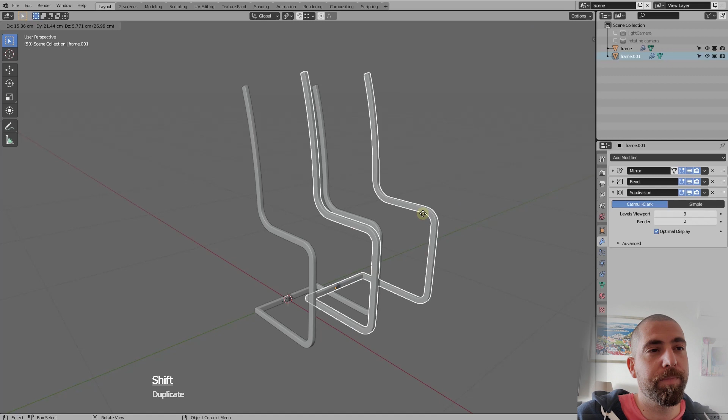So this is our frame, this is our object. Let's call it frame by double clicking. Then with the frame selected, we're going to press Shift D to duplicate this object, and right click to keep it in the same place. We're going to name it seat, our second object.

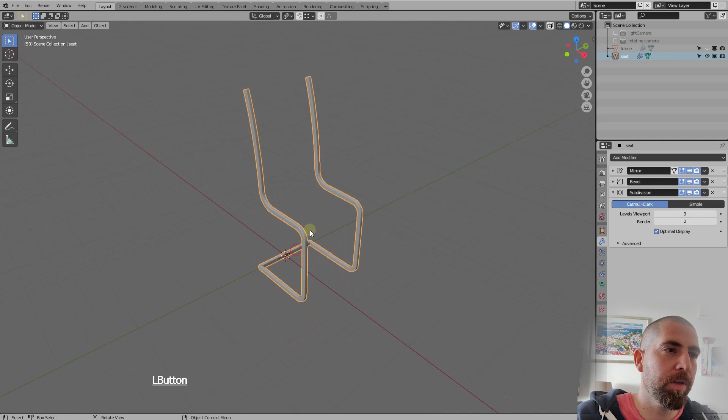Then we're going to switch off the visibility of our frame so that we only have our seat. I know this doesn't look exactly like a seat, but we'll get there.

Have faith, have faith. Okay, so now what we're going to do is turn off all our modifiers, because when we duplicated this object, we also duplicated its modifiers, and we're going to turn them all off.

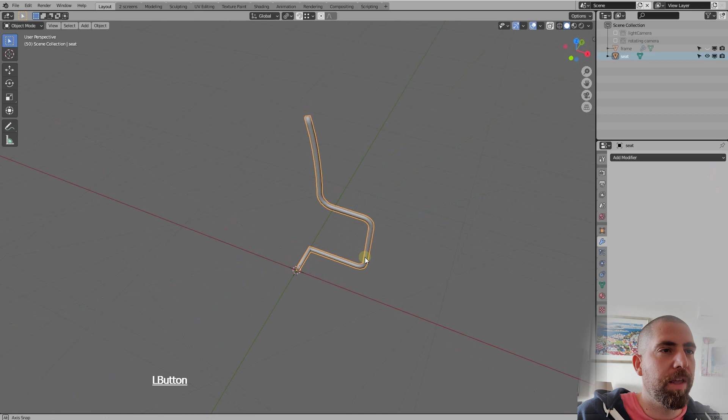And what we're going to do is go into our object data properties panel, and under normals, we're going to auto smooth by 30 degrees. So it smooths these edges, but not this sharp edge.

Then we're going to go into edit mode and select these faces. We're going to be in face select mode by pressing 3, select this face, and hold Control to select all the faces in between these two faces.

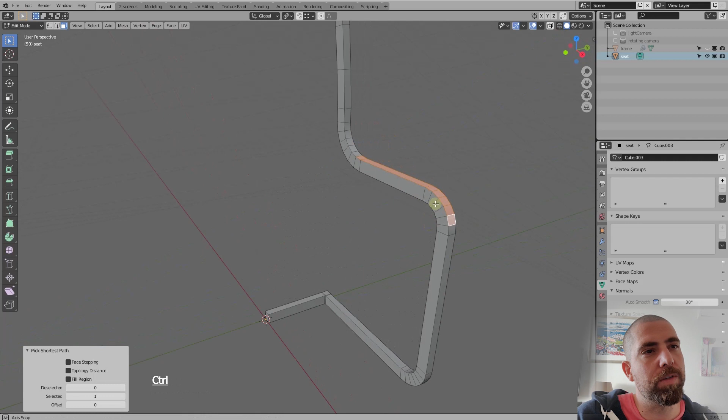Then we're going to press Control I to invert selection, press delete, and delete faces. So now this looks a bit like a seat, doesn't it?

Let's turn on our frame again, and here we go. Now we have our object. Let's select all and go to extrude region, press and hold, and select extrude along normals.

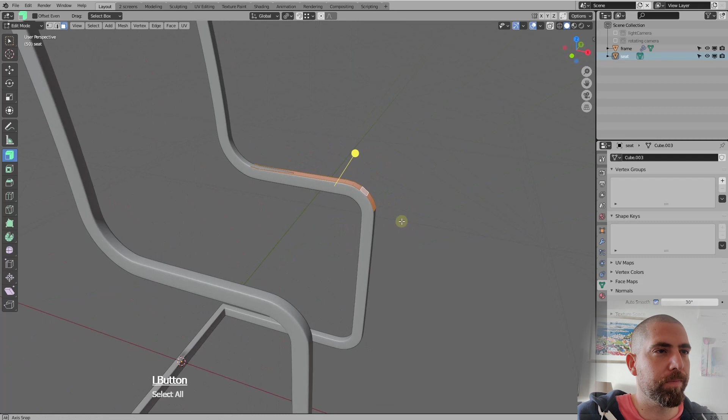So this little circle appears, and you can press and hold and extrude it. In our pop-up window here, we're going to try with 6 centimeters to see how it looks.

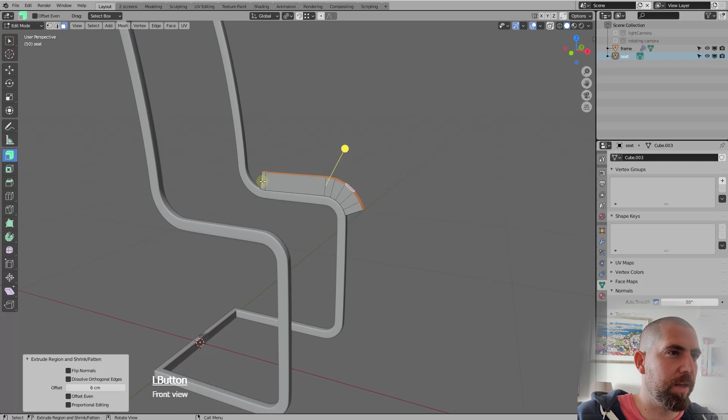Let's go into front view with 1 on the numpad. 6 centimeters looks fine, let's go with 6. Then we're going to select these faces by holding Control, go into select box tool, and move them.

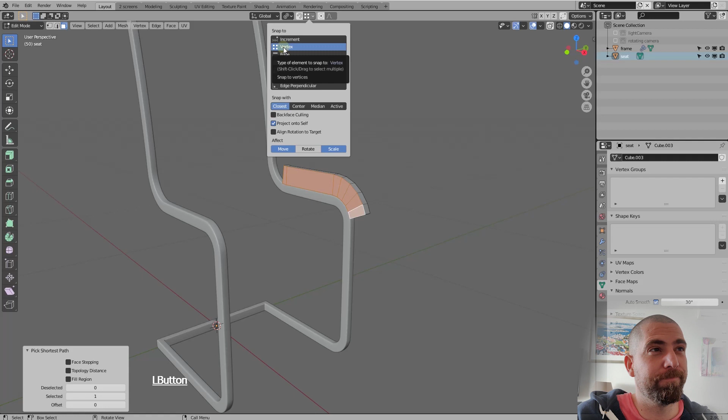Another thing we're going to do here is snapping. We're going to select this Vertex Snapping. Snapping doesn't need to be enabled if you don't want it, but this is another cool tip for you.

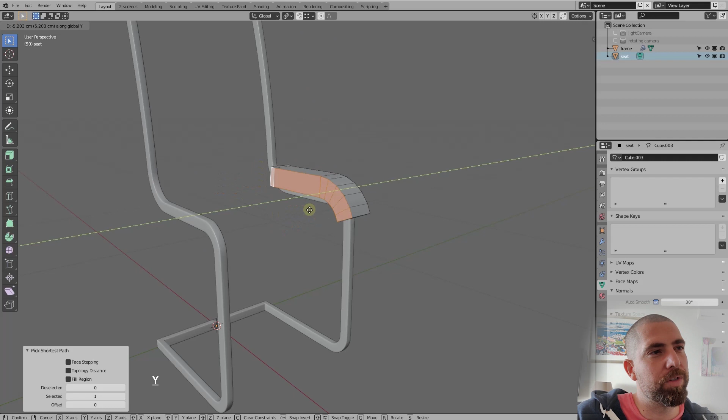Now I want to move this on Y to constrain it on the Y-axis, and snap it to somewhere around here. As you can see, snapping is disabled, and once you've started the transformation, you can't turn it back on. But this is a little workaround: you can hold Control, and this automatically enables snapping.

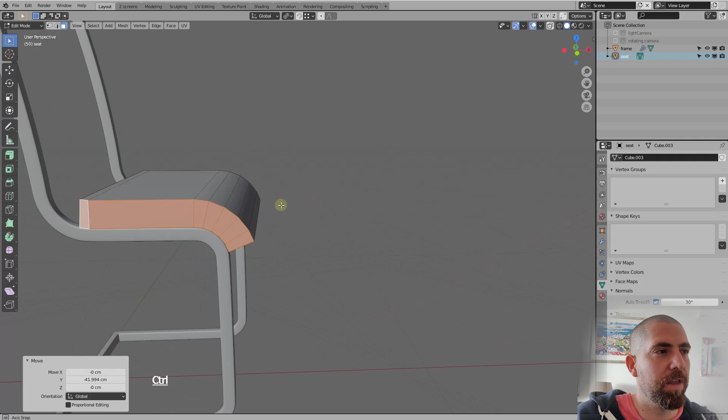So now I want to snap to this vertex around here, and we have our primordial seat. It obviously doesn't look as good as it should, but let's keep it like this for now.

Because what we're going to do is go into object mode, and now we will add a modifier. We will not add a subdivision surface modifier this time, but a multi-resolution modifier.

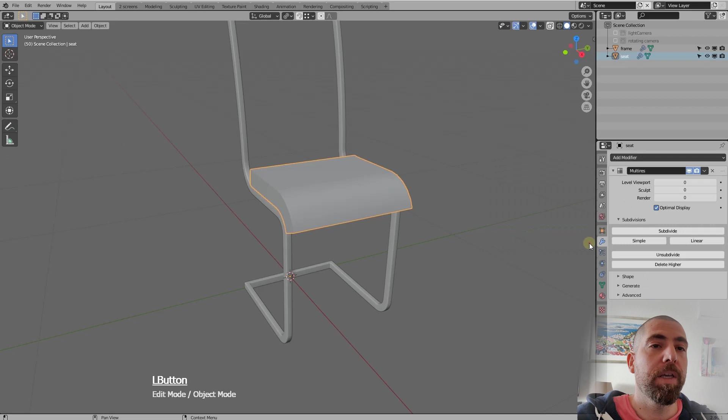It works very similar to subdivision surface, but you can sculpt on it. So that's the cool thing about it. You can sculpt on practically the simplest geometry.

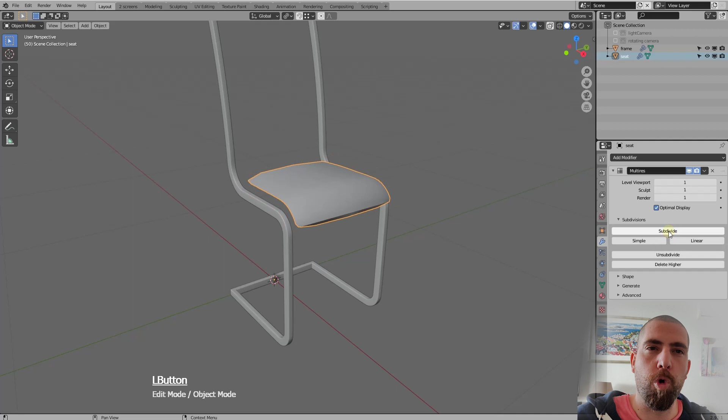But first we need to subdivide it, and we're going to subdivide it by 4. I'm sure it's going to need 4 subdivisions.

So you can see that the results are very, very similar to the subdivision surface modifier, but you can see that something is not right here.

So we need to, just like we added a loop cut here, do the same thing here. Let's go into edit mode.

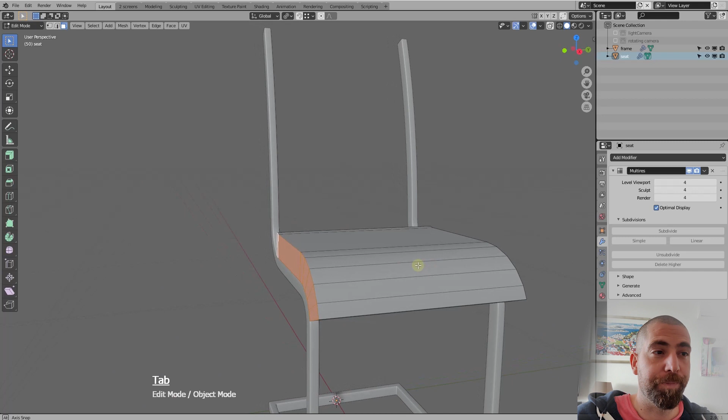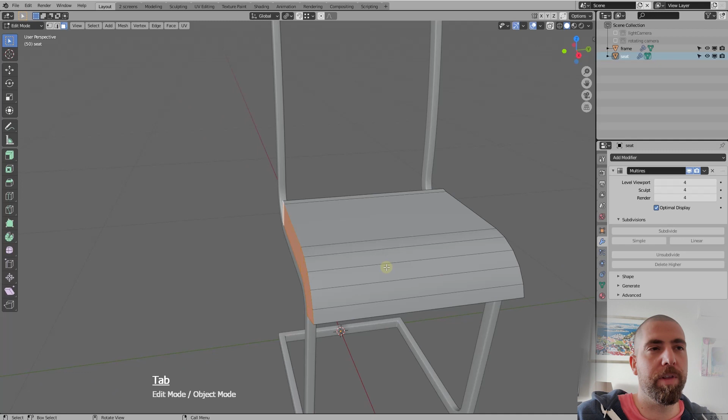The difference between subdivision surface and multi-resolution is that when you're in edit mode, you don't see the change in the modifier in real time. So you need to change something and then go out of edit mode to see what has actually happened.

So this is not the good thing, but everything has its pluses and minuses. You win some, you lose some, you know. So what do we do now? We're going to add a loop cut, but this time we're going to add 2 of them.

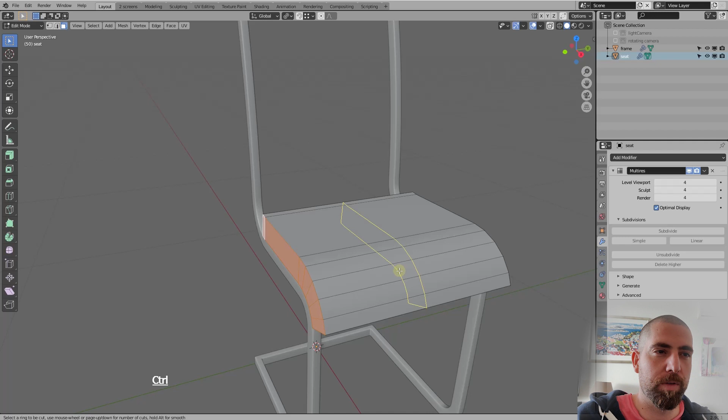So Control R, this is one, and we're going to scroll with our mouse up, click once and click another time, and now we have 2 loop cuts, and we're going to scale them not on the x-axis but on the y-axis.

So why aren't they scaling, you might ask? I'm going to tell you why. Because our transform pivot point is set to individual origins.

I don't know if you can hear the tappity tap. Anyway, so the pivot points are right here, and they're all scaling on the y-axis like this, and so nothing happens. So we're gonna set our transform pivot point to bounding box center. So this is like a bounding box, and the pivot point is going to be here. So when we scale it, these loop cuts are going to move.

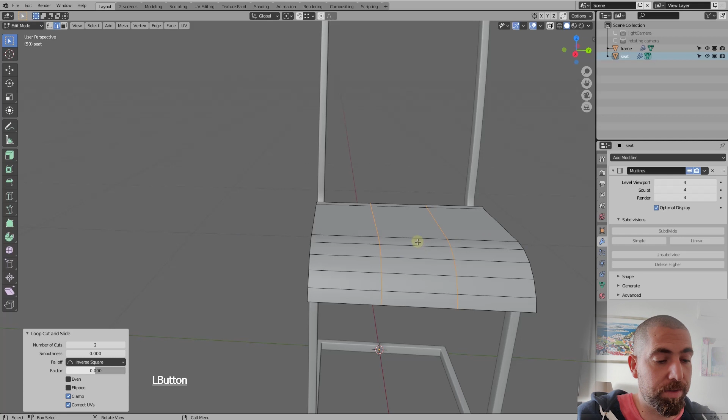Let's see if I'm right. S to scale, Y to constrain on y-axis, and this is exactly what we wanted. I could have just added 2 loop cuts in position 1 and then the other, but then they wouldn't have been symmetrical. So this is why I did this.

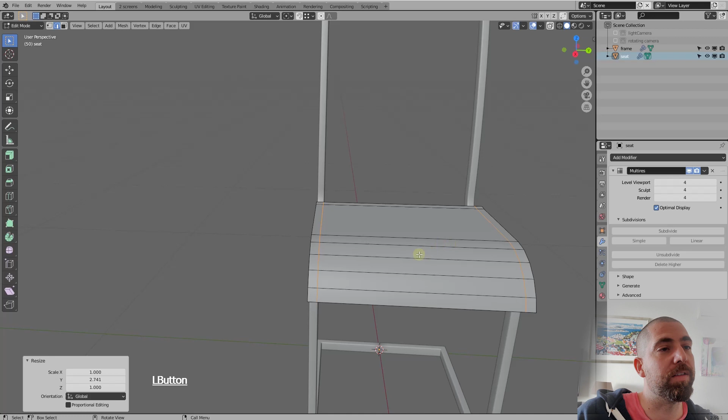Okay, let's go back into object mode to see what has happened. You can see now that this looks a little bit more like a rounded seat. But let's go back again.

Let's go select all with A and scale everything on the y-axis a bit more to go over the edge of the frame. And now let's see what we've done. Let's go a little bit more like this. Okay,

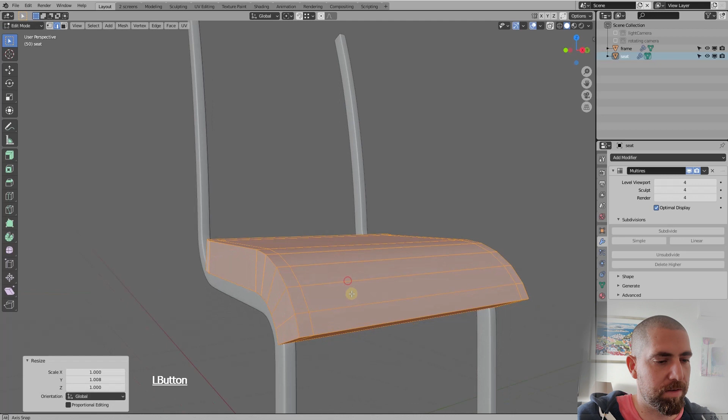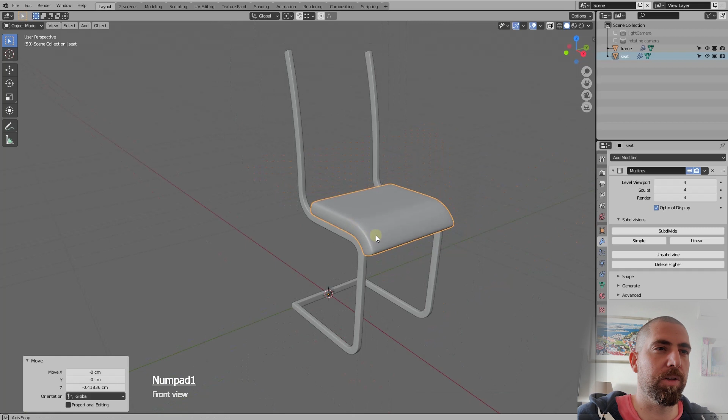This looks fine, but still, I'm definitely gonna need to move it on the z-axis just a bit. Let's go into, okay, this looks fine now, but this seat looks okay, but it's not exactly the shape we wanted.

It's a little bit too sharp here, and also these two are like not real, you know. It looks too perfect. Of course, nothing in reality is perfect like this geometry that we've created right now.

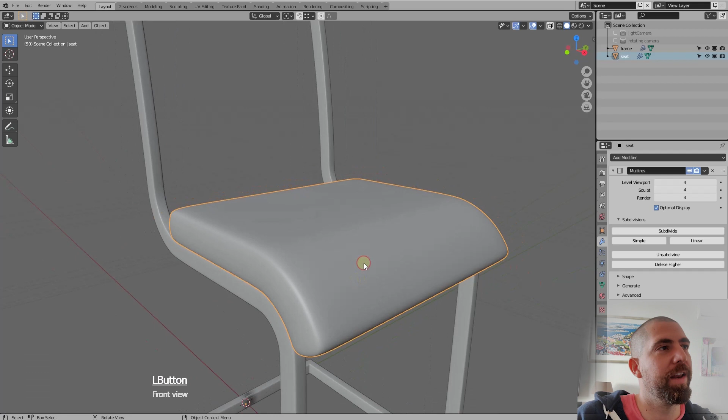So what we're gonna do, and now starts the fun of this episode, we're gonna go into sculpt mode. Sculpting, let's go here.

Oh, this is nice. With this tool selected, this is the only tool you're gonna use, and it's already selected out of the box. You don't need to sculpt another David. You're not Michelangelo, I know. But anyway, some knowledge about sculpting is very useful, and it's really, really easy to use in Blender.

So let's begin. This is our tool that we're going to use, and as you can see, the cursor is showing us our brush size. You can change this size by pressing F on the keyboard and moving your mouse for a bigger or smaller brush. I think this size should be okay, maybe a bit bigger, like this.

And my pen, for my tablet, because I have a tablet. I don't know if you can see it. It's a graphics tablet, but you actually don't need it. But I'm still gonna use it, so sorry. And I have a pen. I have an Apple pen, you know.

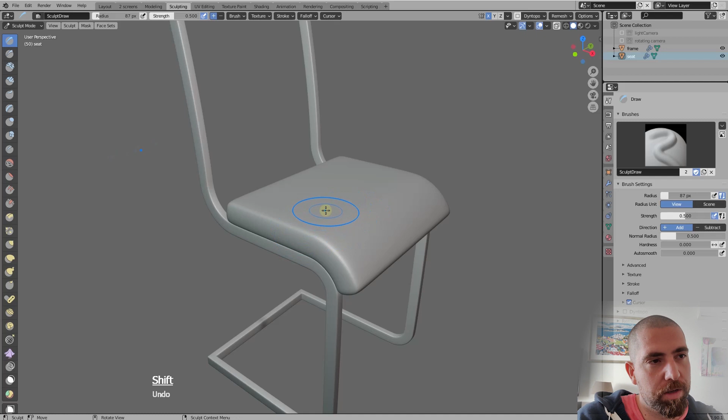But we don't want to draw, we want to smooth. But from every single tool that you choose, you can press and hold Shift to select a smooth brush. So hold Shift and smooth your object. Do you see it smoothing?

It's smoothing, right? Oh my god, how cool is this? How cool is this? Okay, this looks much better, but fast navigating - we need to smooth this part here.

We need to smooth it a lot, and we need to smooth all this. Anyway, I'm gonna speed up this a bit so you don't need - you just smooth whatever you want to get that look that we're going for.

We could have also turned on symmetry, but then it would defeat the purpose of making an object that doesn't look so artificial, you know. So it's better to keep the symmetry off and just smooth by hand from both sides.

Okay, when you're happy with the look of the smoothing, if you smooth enough... oh sorry, I went a little too far over there. Then you can just make your brush a bit bigger, like this, and add some weird geometry up to make it like this, and then smooth it again, of course. So you just add and smooth until you're happy with the result.

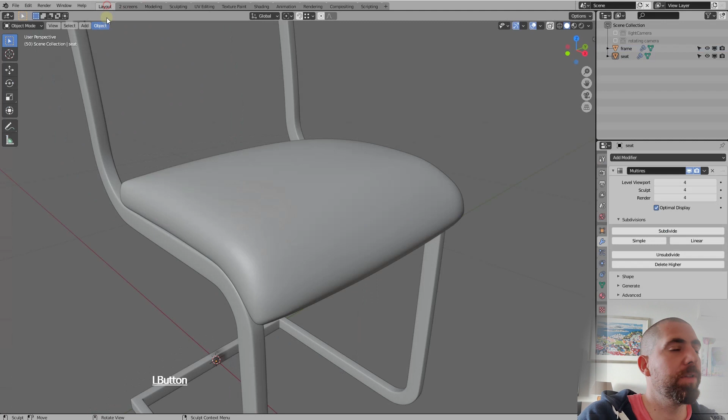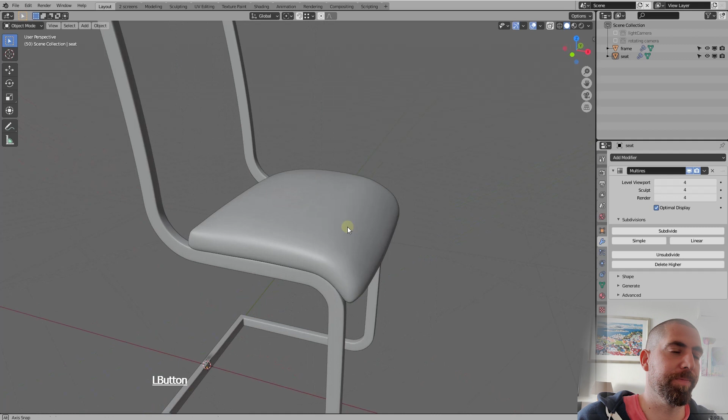Okay, let's go back into our layout tab, and now let's just move this a bit down on the z-axis like this. Okay, this looks nice. You can see that this cushion looks much more natural than the one before the sculpting. Okay, what's next?

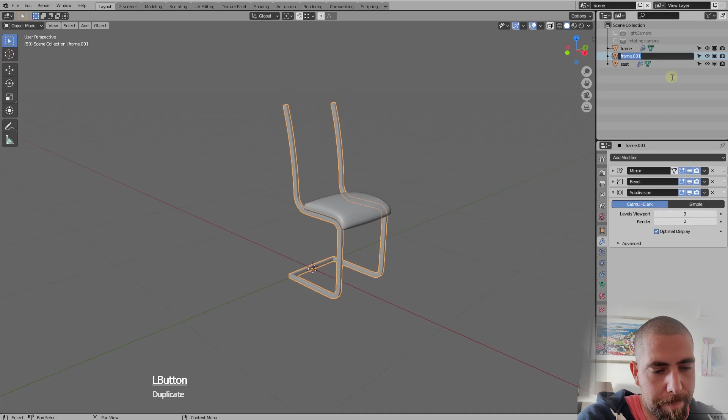Let's create our back for our chair, and let's do it the same way we did our seat. So let's Shift D our frame, right click to keep it in place. Let's call it 'back' our object. Sorry about the caps. And let's turn off all the rest. Sorry, I'm gonna keep the seat because it doesn't get in the way.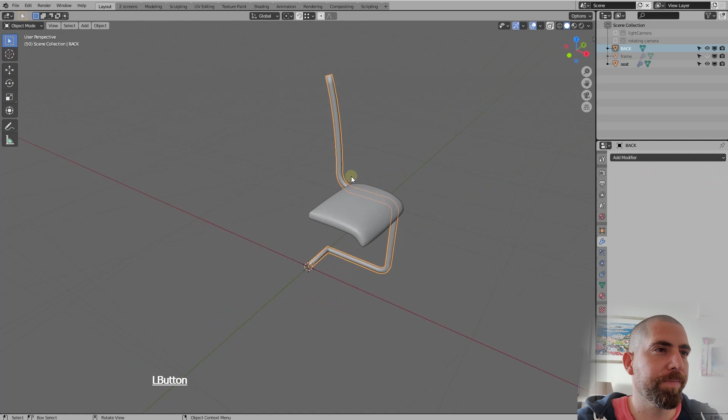And again, I'm gonna turn off all our modifiers. I'm gonna shade flat, and then I'm gonna go into edit mode, and I'm gonna select...

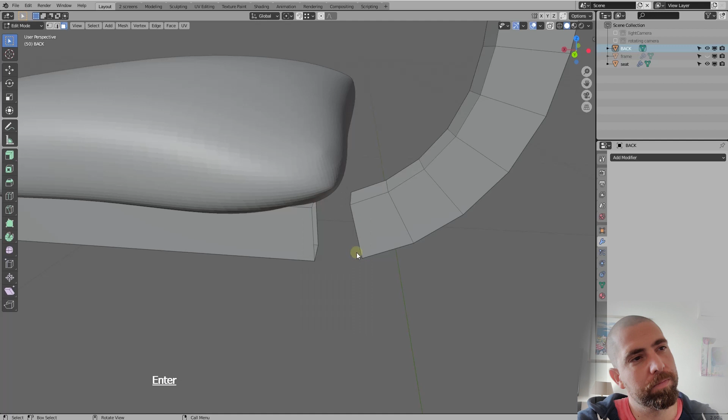this face loop by pressing 3, and on this edge hold Alt and click on the edge to select all faces in this loop, delete them. Select this face, press L to select all connected geometry, delete that, and we have our start geometry for our back.

Let's go into edge select mode with 2 and select this edge and press F. It's gonna close it, and then we're gonna select this loop. We're gonna go into 3, face select mode, holding Alt, click on this edge, and we selected all this face loop. And we're gonna go again into extrude along normals.

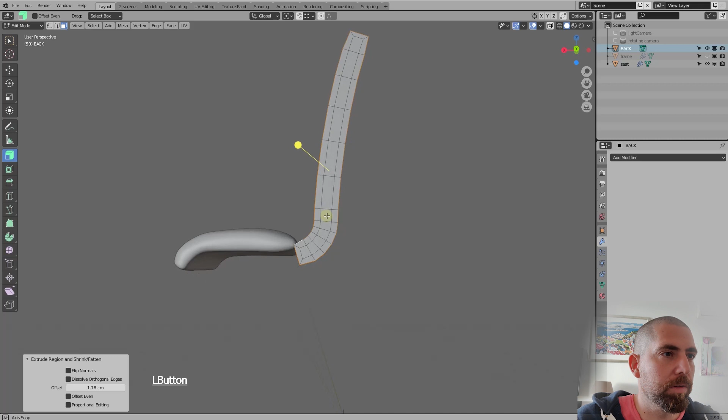Yay! And extrude like somewhere around, this looks maybe too much. Let's set it to 1.5. And you can see that here is a little bit narrower than here, and you can set this to offset even, but in our case this looks even better, so we're gonna keep this.

But we don't need all this extra geometry here, so what we're gonna do, we're gonna select this loop, we're gonna Control I to select inverse, we're gonna delete faces, so now we have this.

And we're gonna go into our edge select mode, select this edge, and press F to close the face. Do it again and again until we close the whole face. Okay, and the same thing on the other side.

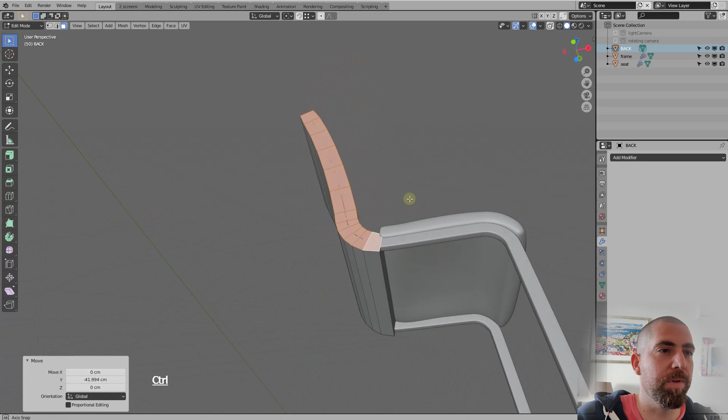Okay, so this is it. Let's bring back our frame to know where we're going. Okay, so here let's reselect. Let's select these faces, and G to move, Y, hold Control to snap, and we have the beginning of our magnificent back. Magnificent back. Have you ever seen a better looking back?

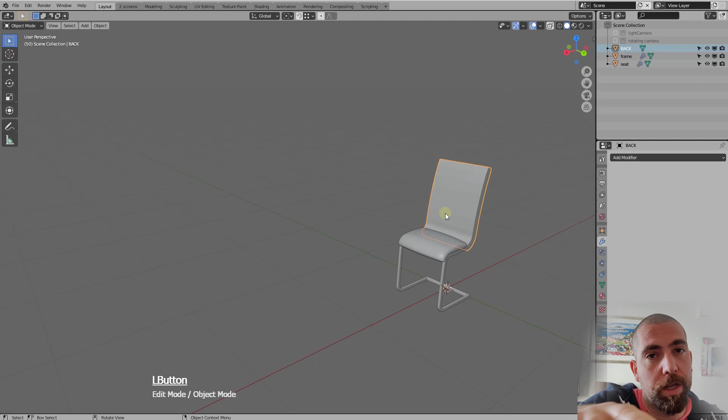Anyway, let's go back into object mode, and let's do the same thing we did with our seat. So I'm not even gonna talk about it anymore. You're just gonna do it by yourself, and you can watch me do it in a little bit of a faster mode. So, see ya.

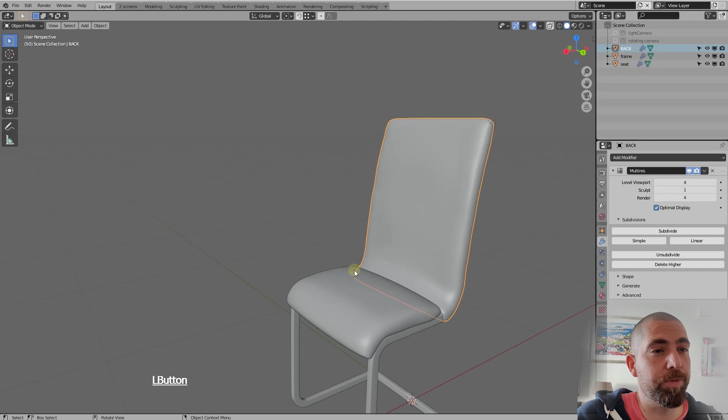Now let's go back to object mode, and you see that our frame has gone up a bit, so let's select our frame object and go into edit mode. We're gonna need to go over here, select this face, and with GG we're gonna put it a bit somewhere around here.

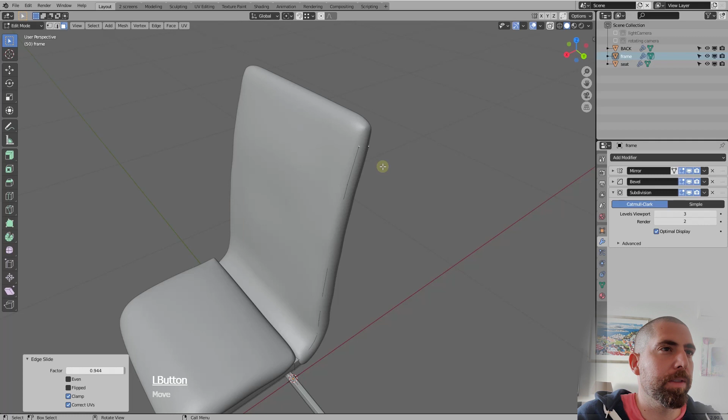Should be okay, but we need to go into this and scale it a bit on the y-axis, just a bit, like this. Okay, and now everything looks the way it's supposed to, right? Looks kind of cool. I think it looks okay.

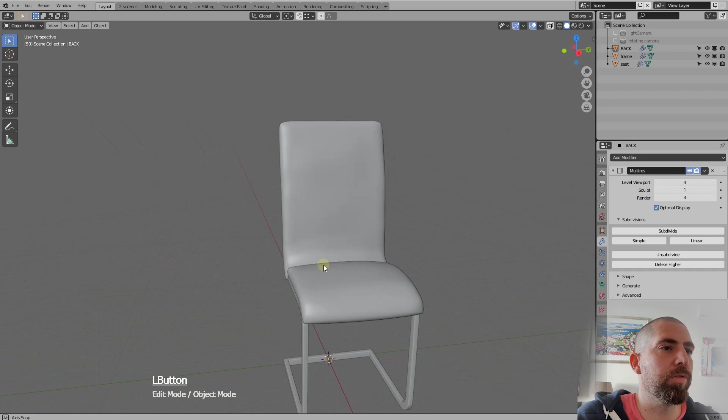We just need to talk a little bit about UV mapping and rendering, and that should cover it. A little bit of node shading. Okay, but we have our work set up.